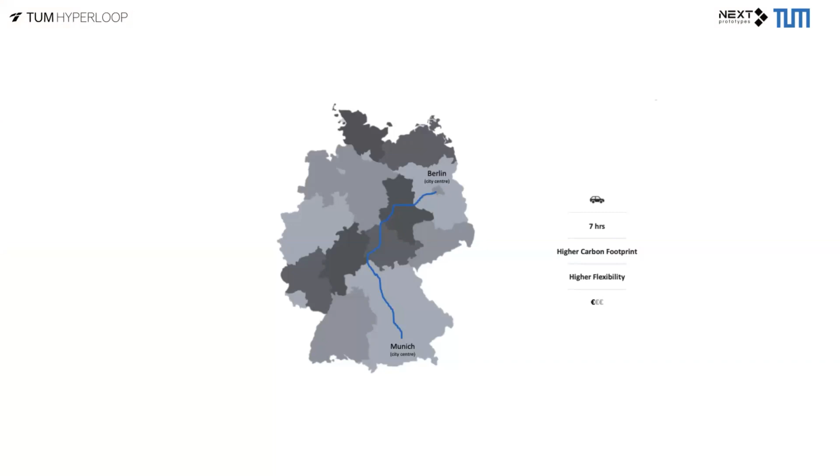For example, when analyzing one route, Munich to Berlin, we tried to understand how it is connected right now. We can see it can be connected by car, which takes around 7 hours. It has a carbon footprint that is high compared to, for example, the train, as we'll see soon, but it has higher flexibility, meaning you can stop anytime you want, leave and arrive on your expected schedule, and it's not as expensive as other modes of transport.

Continuing with this route by train, it takes around 4 hours. The carbon footprint is a bit lower than by car, and it has less flexibility, but it's also a bit more expensive than the car. Let's talk about the airplane, which is around 3.5 hours, but we can see that it has a greater carbon footprint.

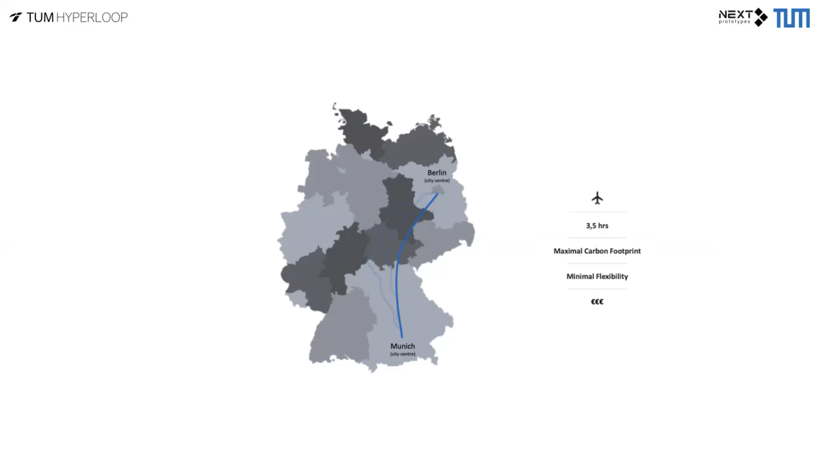There's also way less flexibility because you have to consider the strict schedules and the time to get to the airport and go through security checks. So finally, it also ends up being more expensive.

What would happen if we had this Hyperloop concept that we are here talking about and developing? It would be less than an hour trip with minimal carbon footprint, moderate flexibility, and a moderate price as well. But this all sounds great.

This all sounds like the dream, right? But what does this mean in terms of the impact it can have? What are the different steps that need to be taken to make this dream a reality? We know this isn't something that happens from one day to the other. We know this is a complete process, and it's all about progress and collaboration.

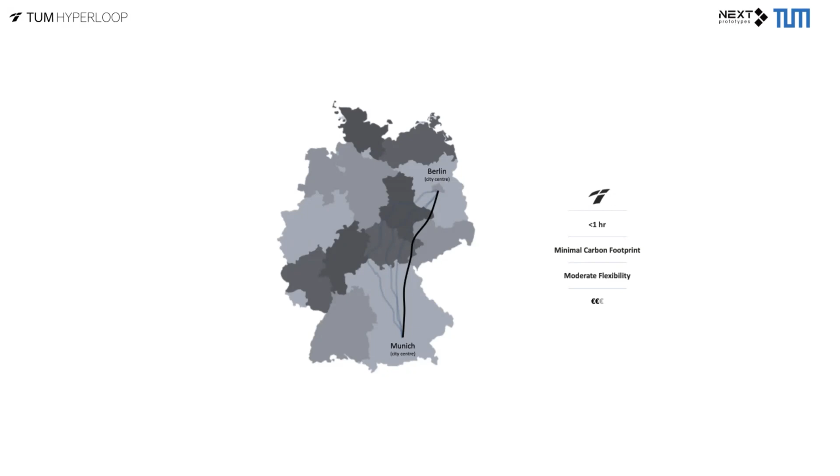And this is what I tried to discover in this research. I will talk a little bit more about it. To understand what steps are needed to introduce a new mode of transport, specifically a Hyperloop, into Europe, I tried to answer 4 main questions that would take me through the process of strategy drafting.

The first question was to understand what's the state of the art of the Hyperloop in Europe. What is the research? What are the companies? What are the research organizations? And how is that translated into technological developments and advances?

The second question we proposed was, what are the transportation trends? The idea was to see how the transportation industry is going towards the future, and then, understanding this, how can the Hyperloop tailor their own service or value proposition to fit into these future transportation trends.

The third one was to understand exactly this: if there is a fit for this new mode of transport. And finally, we were able to draft a strategy by answering the question of what would be a successful entry strategy.

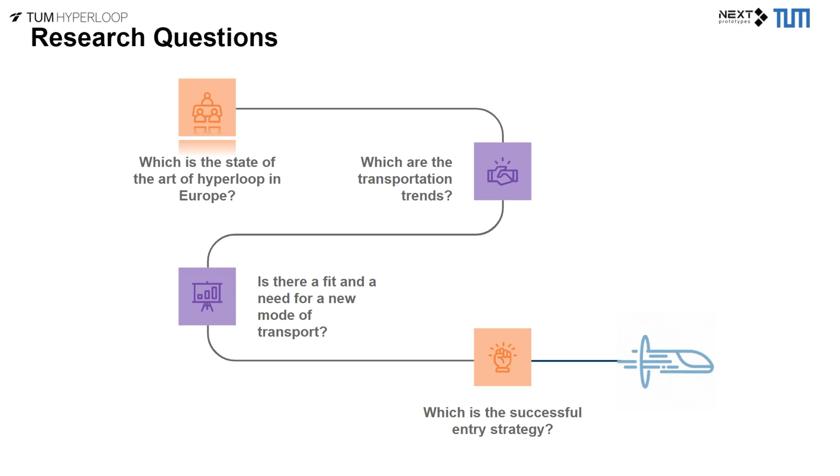These questions are targeted first of all by a literature research, which puts together all the different literature that is out there, not only scientific articles, but also different research such as feasibility studies and theses.

Then trend analysis. This was done by also different types of research on the actual status of mobility and the transportation industry, and then trying to understand the different aspects of where it's going.

Afterwards, 13 interviews were conducted with experts within the mobility innovation sector. In this aspect, we tried to target not only Hyperloop companies and research institutions, but also different companies that are dealing with mobility innovation.

And finally, there was also, as I said, the strategy drafting. So let's see how this looks like after I've explained to you a little bit of how this was all performed.

The analyzed sources that impact the European Hyperloop landscape were around 25, covering 4 main different aspects: technology, market analysis, logistics, and financials.

I am also happy to share later if someone wants to see the sources. I have a full list with the downloaded sources, because what helped us here was to come up with a homologous definition in these 4 different aspects.

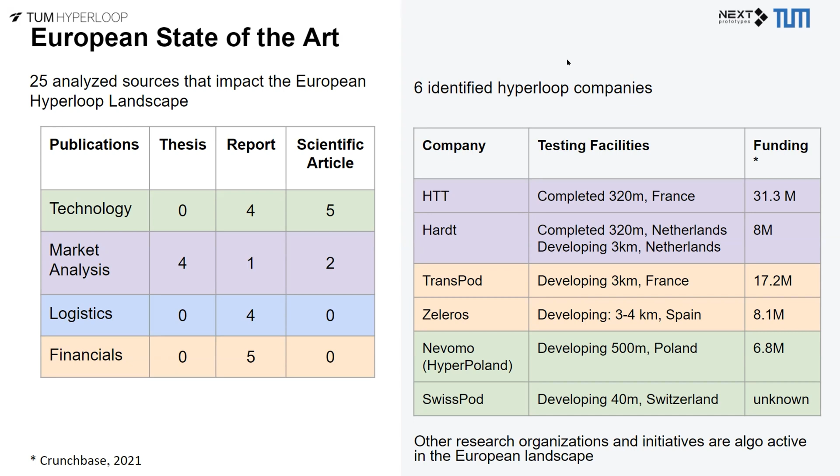We also wanted to see which were the main companies taking action in Europe regarding the Hyperloop. Sorry, I just saw something in the chat, all good. These are the main ones, and we can see that they are already developing testing facilities, as well as the funding that they have.

This funding is extracted from Crunchbase, which is a platform that gives us information on different companies. And of course, also the other research organizations and initiatives such as TUM Hyperloop. With this understanding, it was possible to see that the European landscape regarding the Hyperloop is very developed, and there's also a lot of willingness to bring this into our reality, shown by the different investments and research projects pushed forward by the European Union.

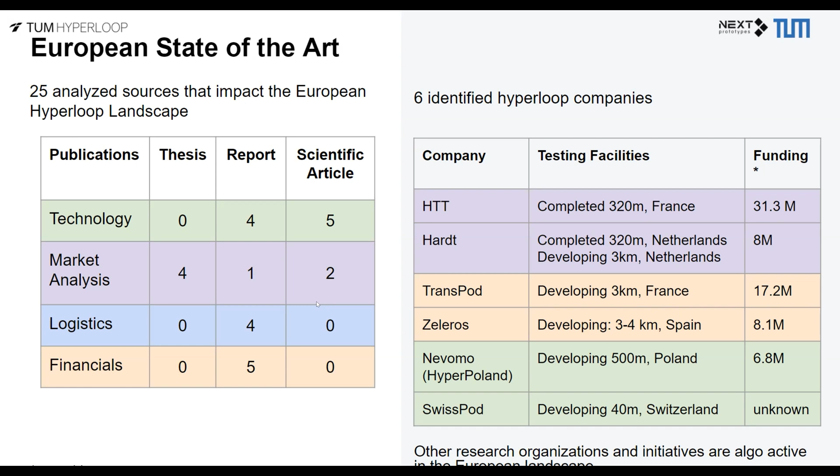But let's now look at the trends. We were able to identify trends in 3 different aspects: the economic, the social, and also the technological. This, as I said, would help us understand how to create a strategy that suits the path and future of the transportation industry.

So let's talk about the economic trends. One of them is the share economy, which is giving rise to shared mobility. We can see this taking shape in a lot of car sharing services, and more and more people are not so much willing to own a car, but rather to share it.

Also on the economic side, we see intermodality through mobility as a service. This is something already being developed, trying to integrate different modes of transport into one same platform, where you can have the flexibility to decide where and how you want to travel, combining two different modes. So in just one app, if I want to get from point A to point B, maybe I'll use a bicycle and then a train, but everything is already integrated into one same service.

Then it was also found that there has not been enough transportation funding in past years, because there are a lot of lacking projects that have been tried to be solved with European funding and also with existing state or country government, but somehow it ends up not being enough to sustain all the projects at the speed that would be wished for.

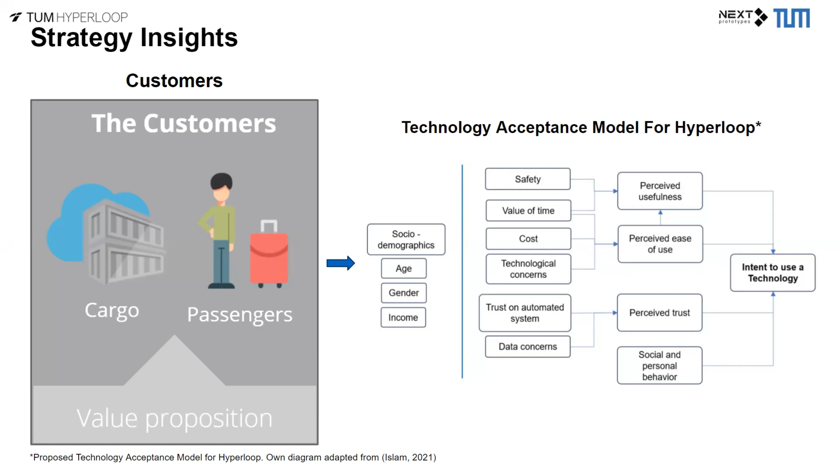But this is also very interesting research, I recommend it: the Technology Acceptance Model for Hyperloop by Islam. It really brings us more understanding of the things we have to focus on while developing the technology, but also while developing the value proposition to address customers.

Now let's go towards the other two aspects that were the main takeaways from the interviews and from the research. When we talk about the main challenges, we know acceptance is something big. We have to understand that the passengers and the public will maybe at first have a lot of skepticism towards a new technology that is also foreign to them.

So this is something that has to be closely targeted in the value proposition and also in the whole timeline of the project. Regulations are also a big issue, as we all know, and every Hyperloop developer is already working towards this, but it's something that most of the interviewees were most concerned about, because it could be a main barrier if the regulations are not done with enough understanding of the technology, but also of what the public and the whole ecosystem around the technology needs.

Then we have the aspect of sustainability and technology development. We know that developing technology can sometimes not be as green as we would wish, but this is something that also has to be communicated. I'll talk about it in the next step, but of course we also need to know how to communicate the sustainability of the Hyperloop, because we say it has lower emissions, but we also have to consider the complete life cycle of the construction of the infrastructure and so on.

As I said, I'm really happy to elaborate if there are questions, and also to send out the research. But for now, this is it, and I'm happy to hear the questions. And again, thank you for the invitation.

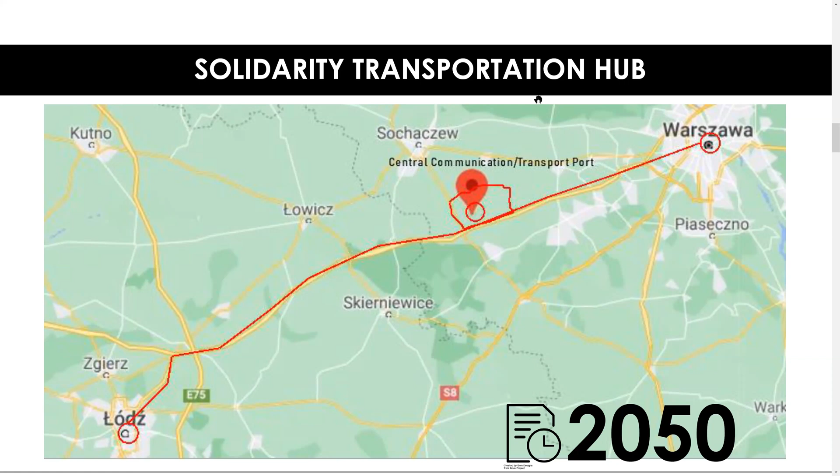What is the Solidarity Transportation Hub? It's a project of a new, modern, and huge transportation hub in Poland, supposed to be located, as you can see in the slide, somewhere in the middle of nowhere, actually, but mostly in the middle between Warsaw and Łódź. Why? Because research found that the biggest passenger flows are between these two cities, so it was natural to place a big intermodal, multimodal transportation hub with a huge airport there. All the research and preparation phases placed this huge airport with a big intermodal hub in so-called Gmina Baranów. The whole project is supposed to be finished by the year 2050, and it is supposed to change the landscape of transportation in Poland, and also in Europe.

As it is still in a conceptual phase, it is natural to place there other ideas, which are also in a conceptual phase, such as Hyperloop in Poland, part of the Euroloop network. Nowadays, we have only visualizations of several projects done by architects for the Solidarity Transportation Hub. One of them is a concept prepared by Chapman Taylor, and what is important about it is that it is explicitly said to be Hyperloop friendly.

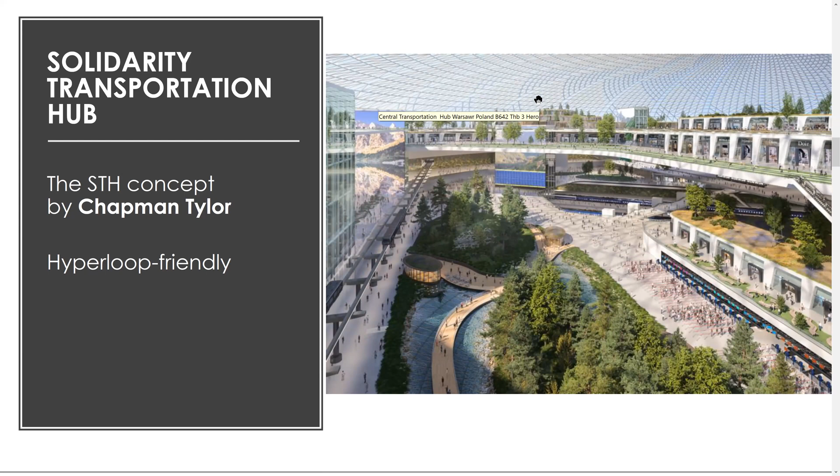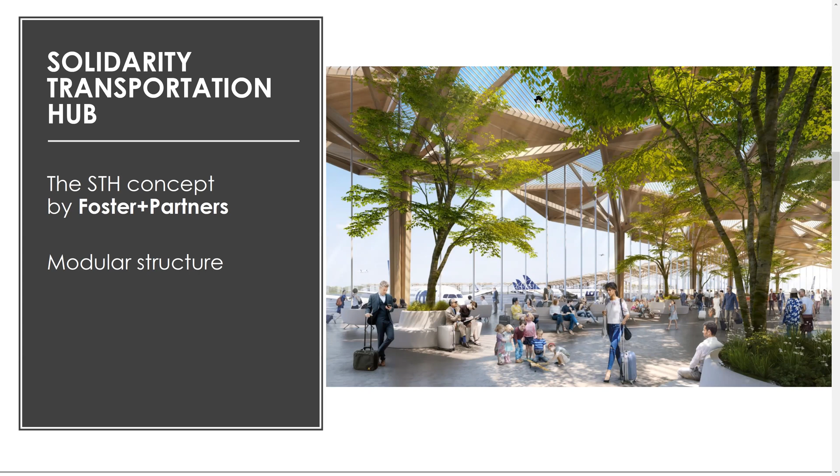So they foresee placing there, combining Hyperloop technology with this huge transportation hub. Another project, done by Foster and Partners, is the concept of a modular structure for this huge transportation hub, so there is also the possibility to place Hyperloop technology in some modules. So there is potential for combining Hyperloop technology with this huge investment. The modular structure gives us the possibility to place our station underground, overground, or on the ground, and conduct experiments with different possibilities without special costs, because it is all done via computer simulations.

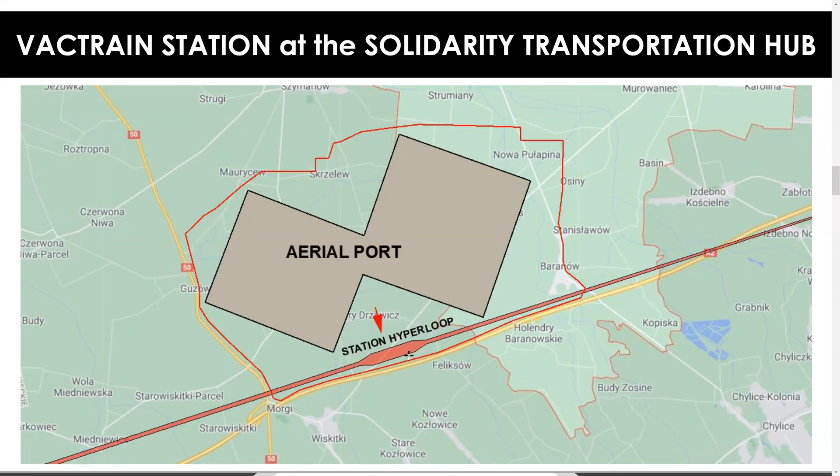So far, there is no master plan for this Solidarity Transportation Hub, so we don't know how it will be placed in that Gmina Baranów. It is our forecast here that in this Hyperloop line, we can put a station here, close enough to this big airport, so it can be a real part of it.

Vacuum technology in Poland was also a huge project financed by European funds, titled 'Potential for the Development and Implementation of Vacuum Railway Technology in Poland in the social, technical, economic and legal context.' We are part of this research, which was conducted for 17 months, and in these days was finally accepted - the results were accepted, so the project is closed.

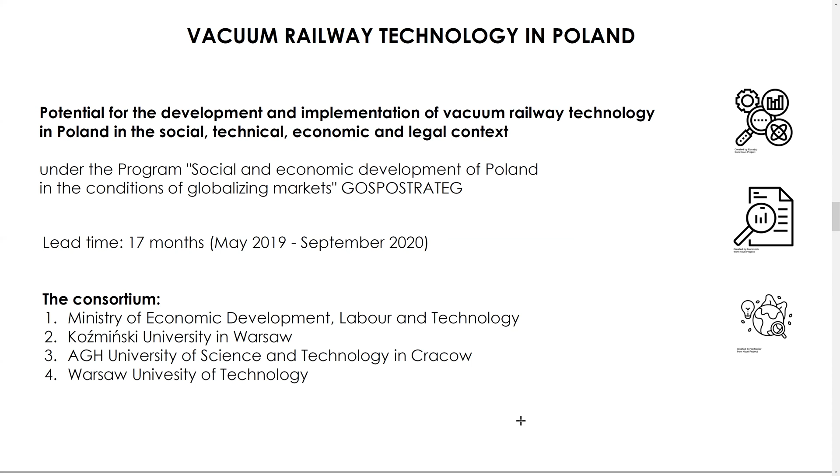The consortium was comprised of four big partners: a ministry, one private university, and two of the biggest technical universities in Poland - and here we are, the AGH University of Science and Technology. As part of our research, we designed a Vactrain underground station, supposed to be placed in the Solidarity Transportation Hub. We considered the underground route, so our station is also placed underground, because there we have much more flexibility in designing.

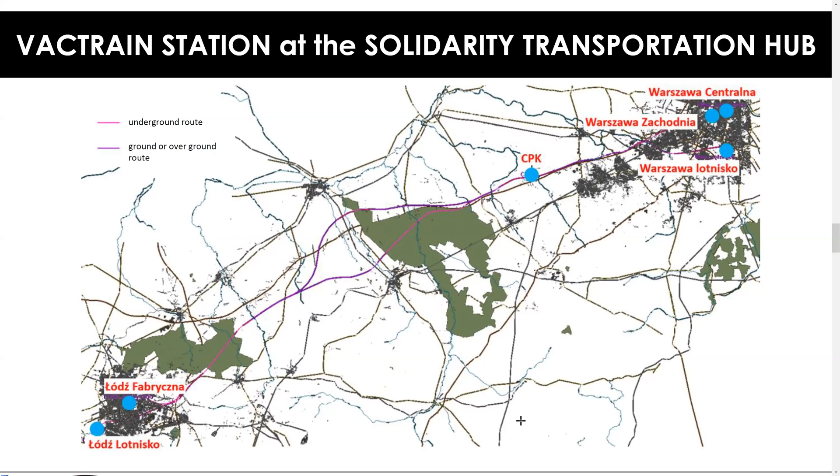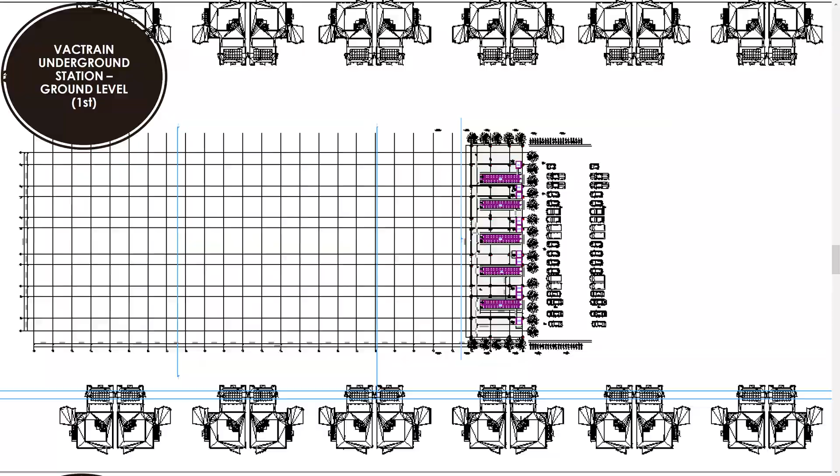The project was done in the ArchiCAD program, where we can observe 2-dimensional and 3-dimensional models. The station is a 4-layer object. The first level is on the ground and places the entrance and parking lines. The second level is at -5 meters and places some infrastructure.

Then we go deeper. Here we are still on the second level, 5 meters below the surface, and here we have check-ins, security check, and so on.

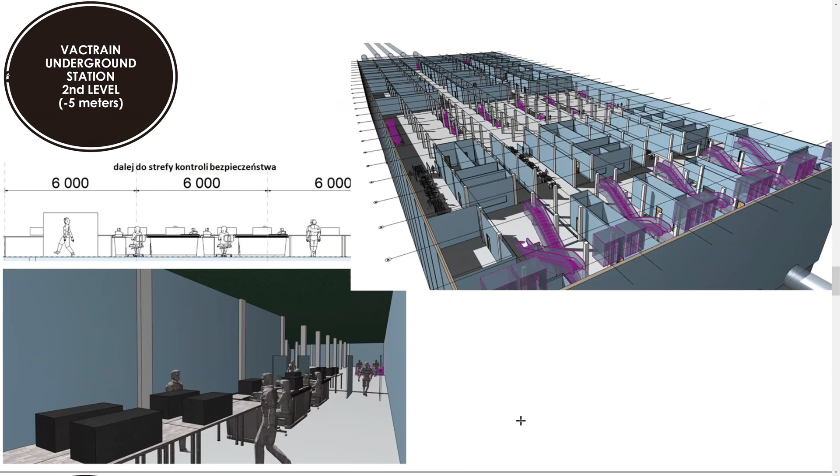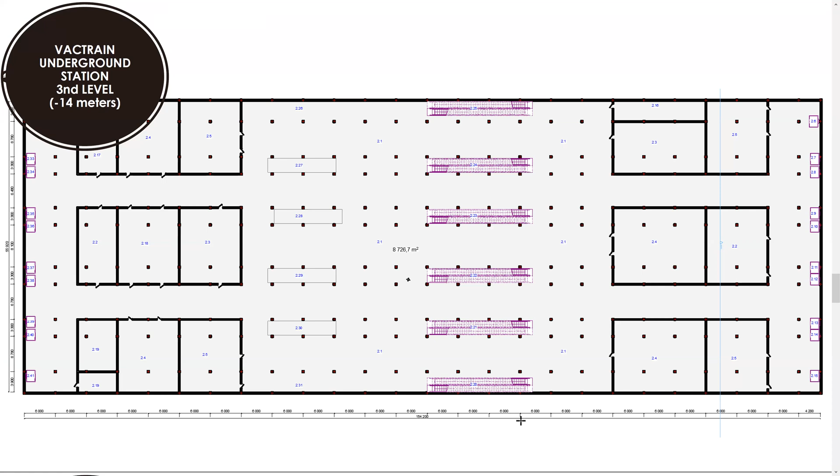Then deeper, we can go to the third level, where we have typical aerial infrastructure, on the level of -14 meters below the surface. Here is the visualization of this level.

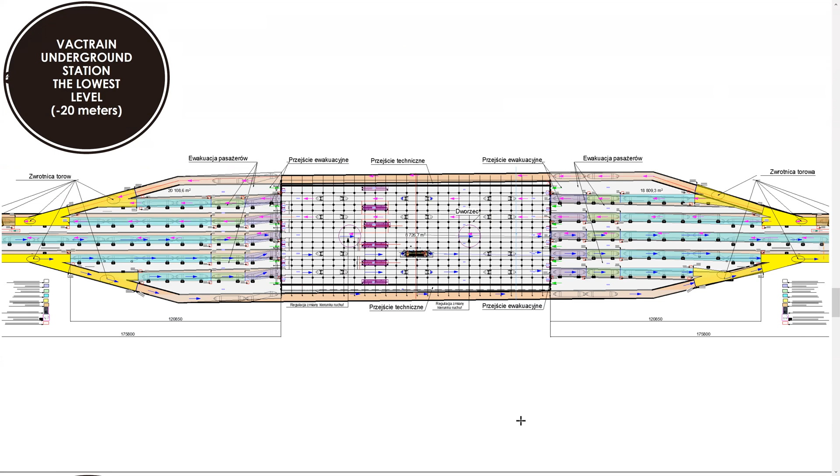And finally we reach the 4th level, and we are finally at the platforms, where we can get into capsules of low pressure trains.

Here you can see slides of this station, and finally we can show you how it could look like from the outside. As you can see, the tube here goes underground.

More details here about this design will be presented now by Dr. Strychniowska. So Olena, the floor is yours.

I'll share my screen, one moment. Can you see my screen? Not yet, okay, one moment. Is it visible now? Yes, we can see your screen. Yes. Okay.

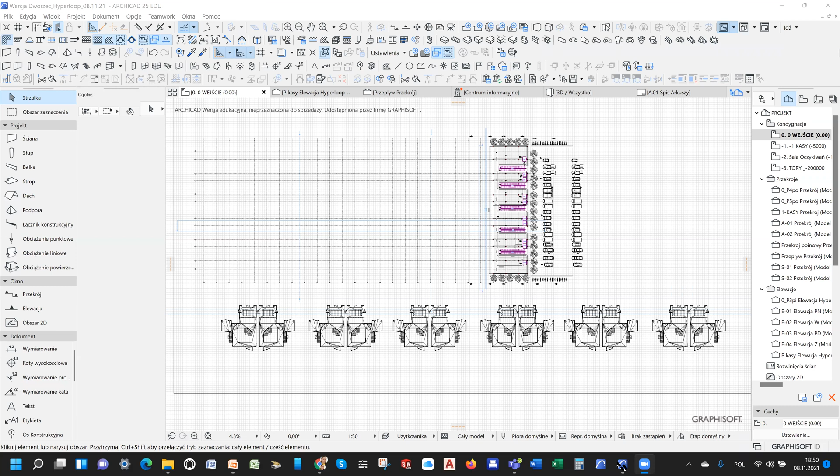I want to introduce the Hyperloop model, which is a representation of an underground hub. I used the Archicad program, and the model consists of 2D plans with the possibility of transitioning from the sections of facades to 3D.

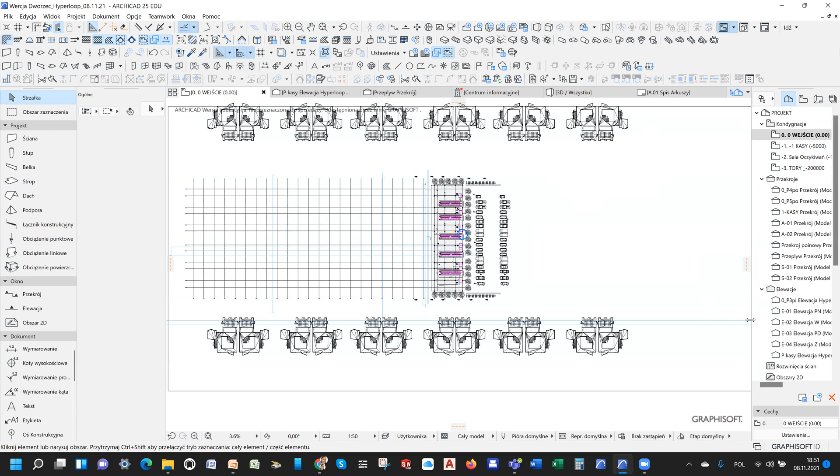I see these options. For example, I see the horizontal section, and you can see all the information of the Hyperloop.

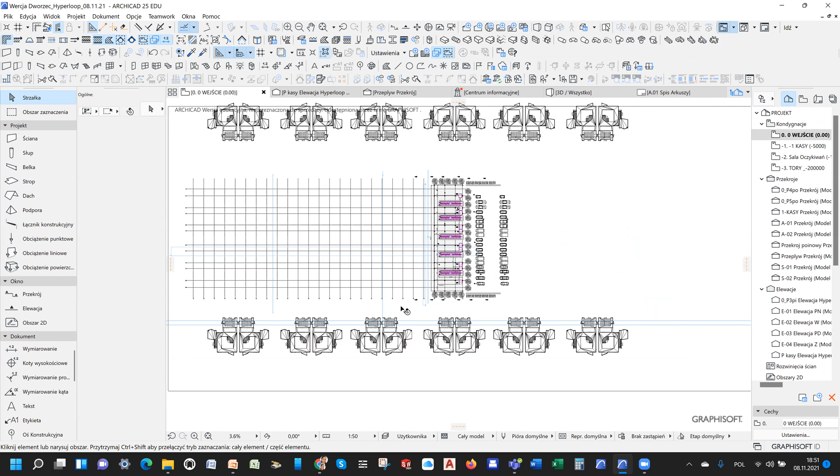The 2D plan has 4 different levels. The first level here is on the ground level. The second one is 5 meters below ground level. The third one is 14 meters below ground level. And the last one is 20 meters below ground level.

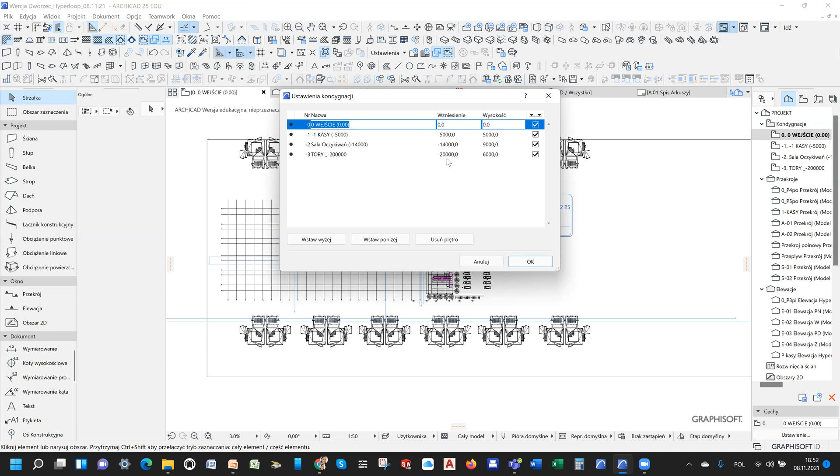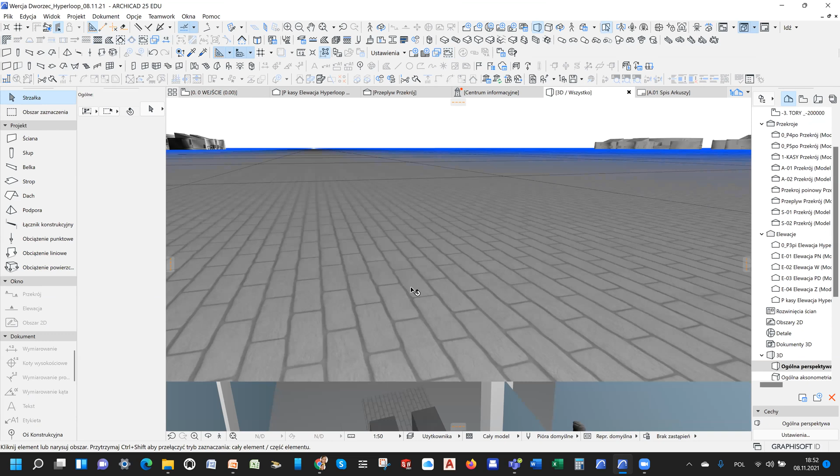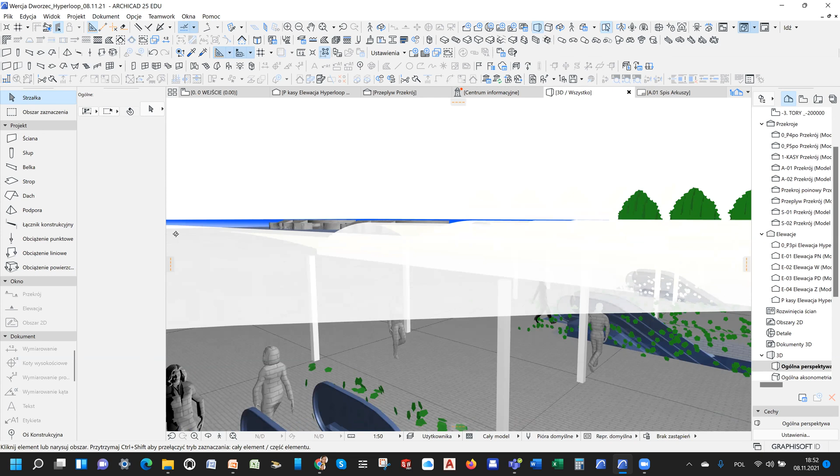On the first level, there is the entrance to the Hyperloop, which consists of escalators and elevators, so that you can go to the lower floor.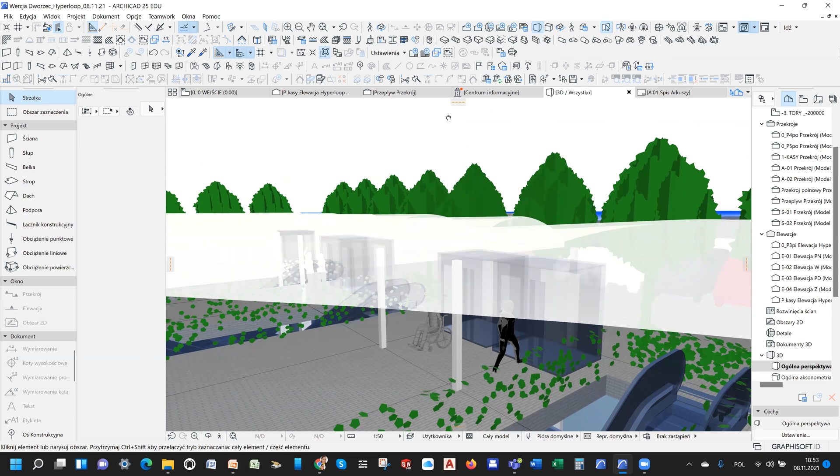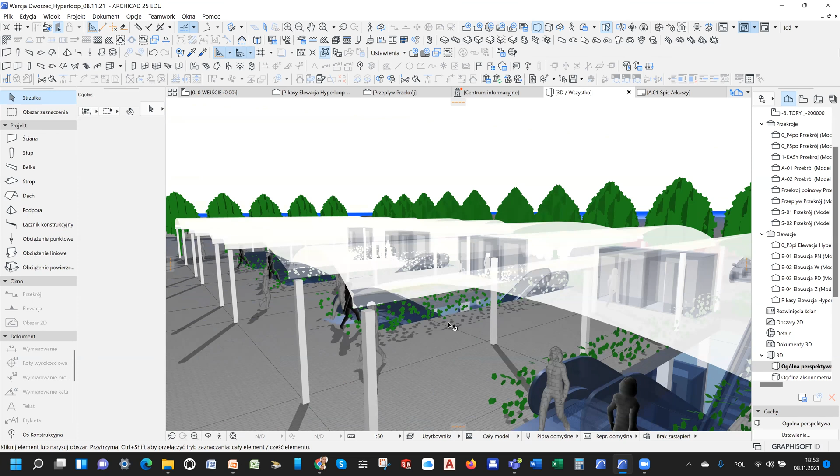A parking lot for cars and bicycles has been designed near the entrance to the Hyperloop also, for parking and bicycles.

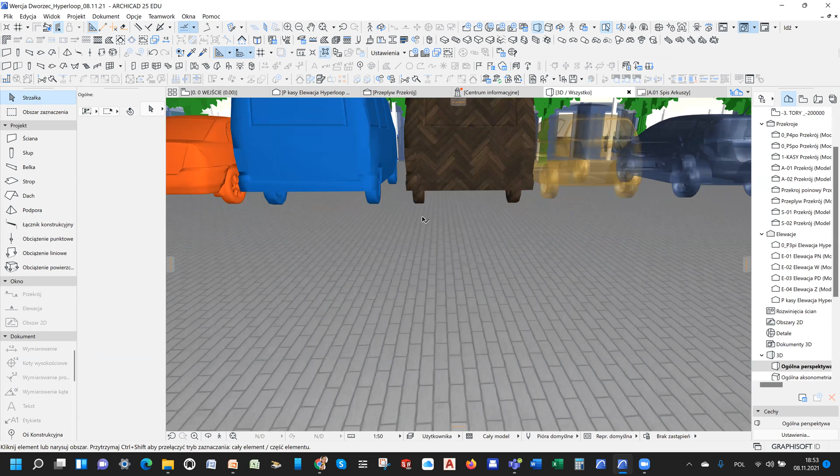Also, on both sides of the entrance, lifts for disabled people have been designed.

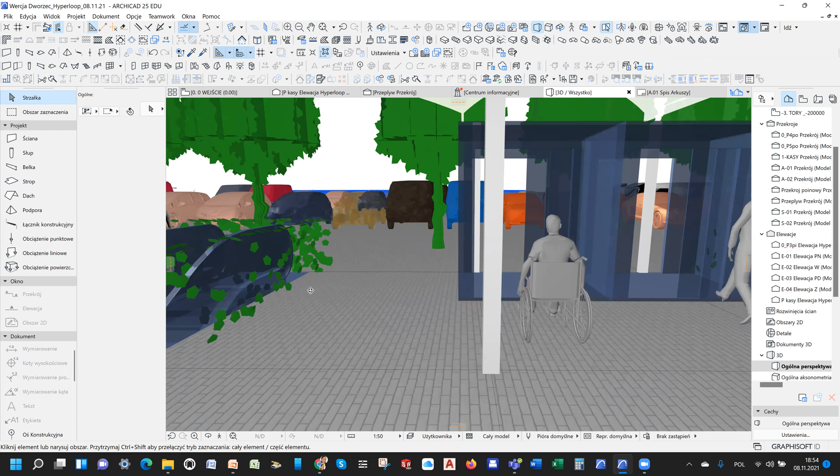On the second floor, there are cash desks, gates, toilets, administrative and service rooms, and a medical center, a lost property office, luggage office, and boutiques.

And we can go down to the lower floor.

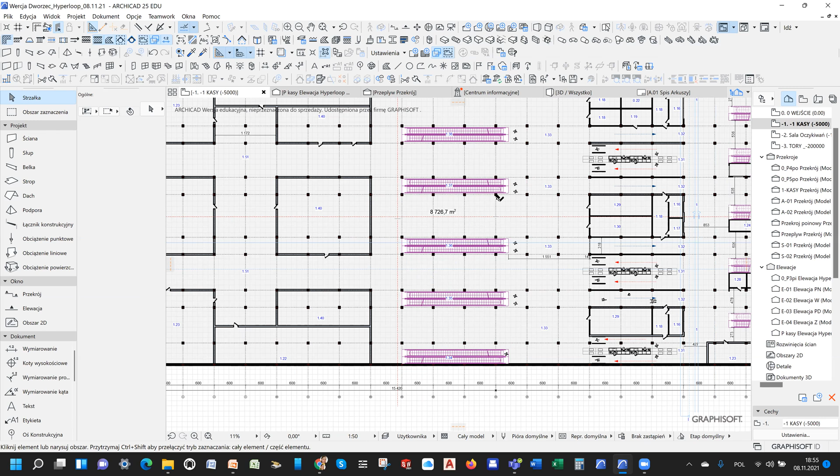On the next level you can also see boutiques, a city cars room, utility room, disposal room, office, break rooms, VIP rooms, and a room for disabled people.

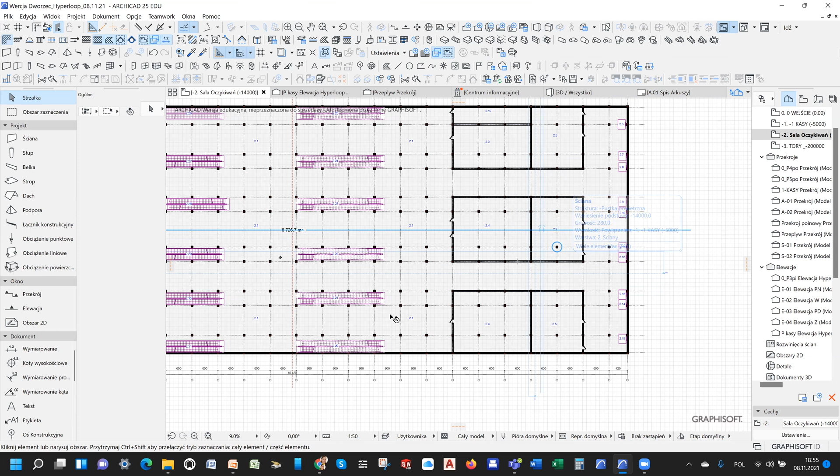Safety gates also, and an exit zone, a zone for entering escalators, reaching the lower level and last level.

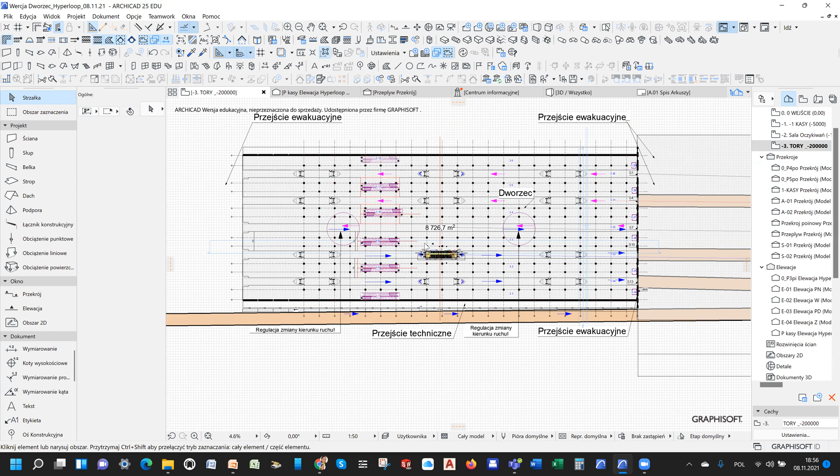On this last level of the model, there are platforms to enter or leave the Hyperloop capsule.

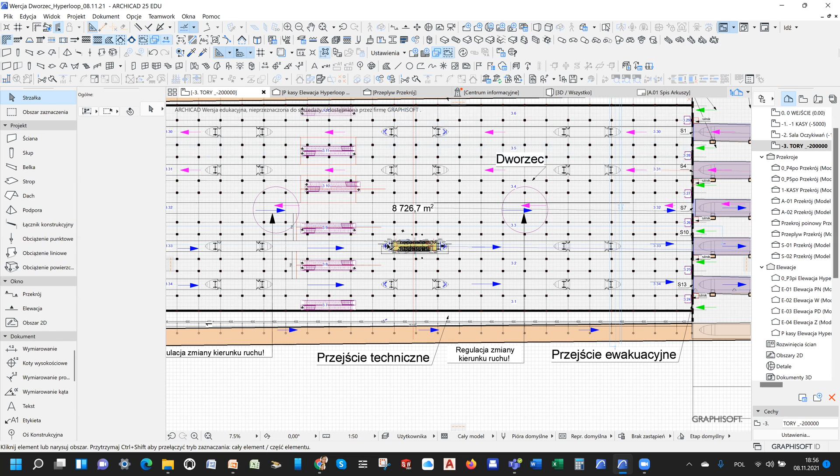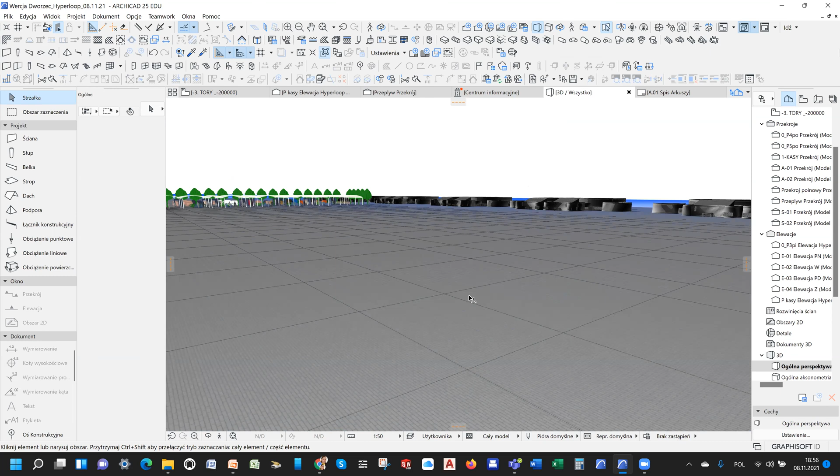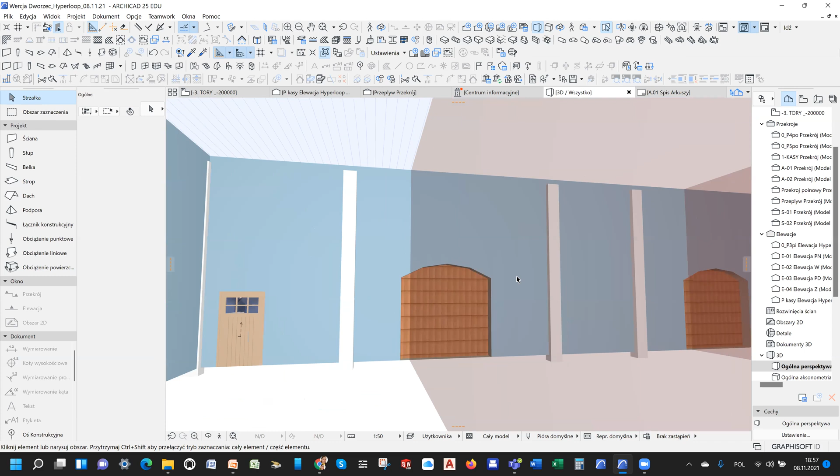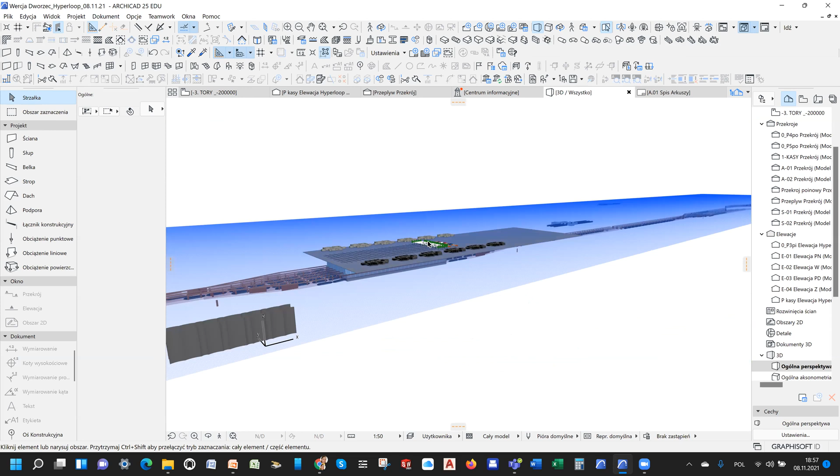And we can see the 3D model, the capsules, and we can go through the rooms. We can see all of the model of Hyperloop.

This model has so many objects in ArchiCAD, and individual objects as well.

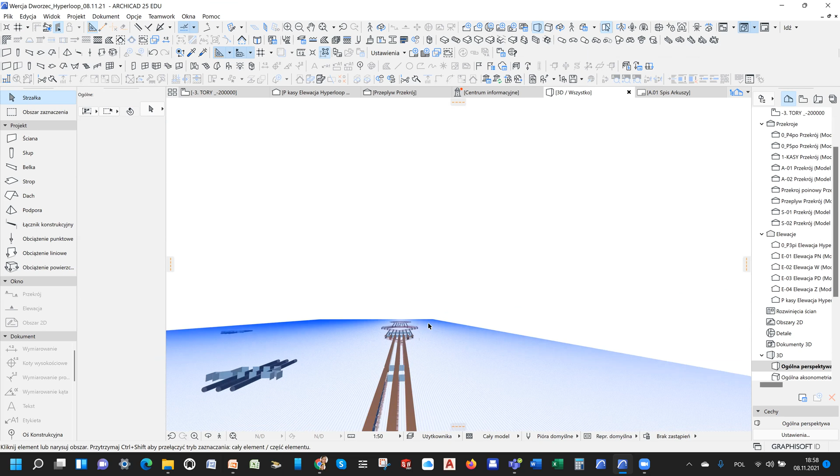This is the entire transport system for the Hyperloop, and this system I see now.

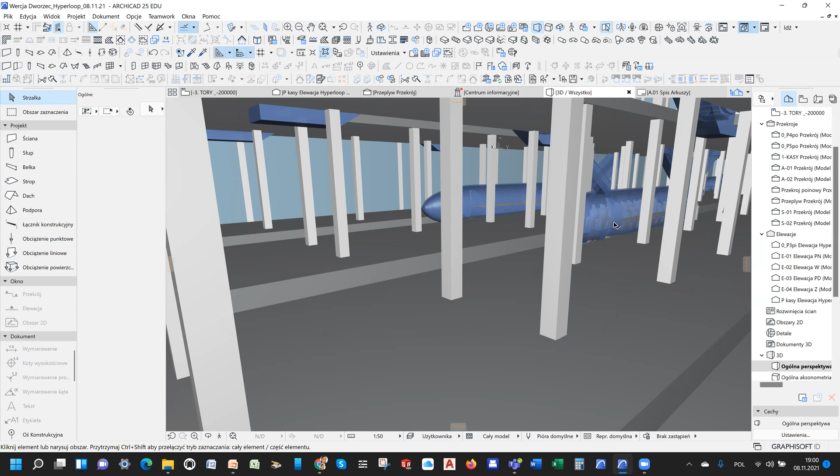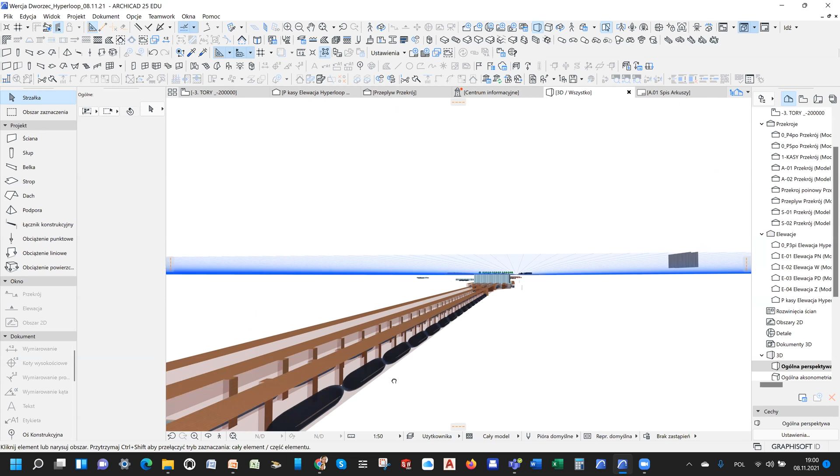Can you see capsules and people in the capsule? And all of the transport system. Okay, thank you for your attention, and I give the floor to Dr. Rafał Rumin.

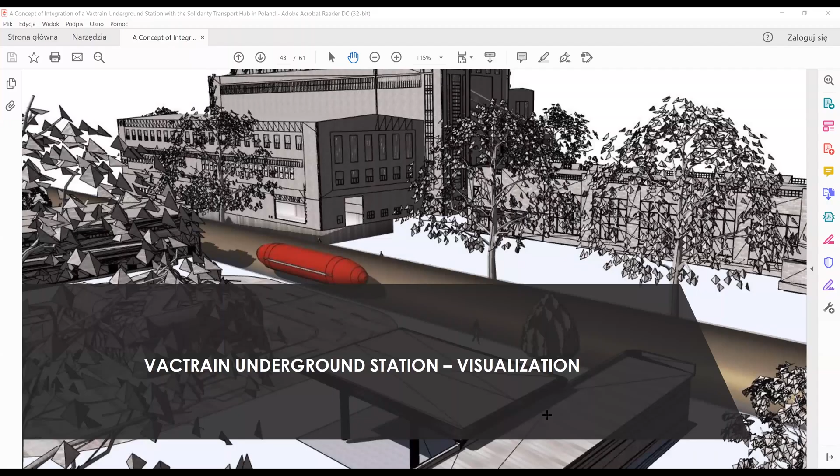Okay, Dr. Gdowska, please share the screen with the presentation, and I will start to talk about why we are showing you the ArchiCAD design and all these details.

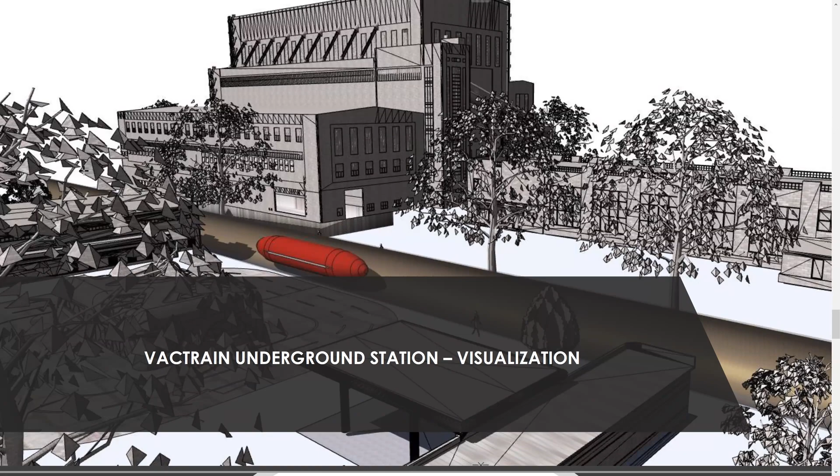Mainly because the work we've done here has not only the aim to show a visualization of how it could look like. We wanted to do something more, and we did something more, because we prepared simulations based on this conceptual model. Next slide, please.

Based on this conceptual model, which was done by Dr. Stawnicka, we created a simulator using software like FlexSim. We created a dedicated station system which can be supported by passenger flows and capsule flows.

The whole system can be included in those simulations, and we will share some basic data about our model to give you information about what we can provide as a team, for example to your models in the future, if you would like to join or invite us to operations.

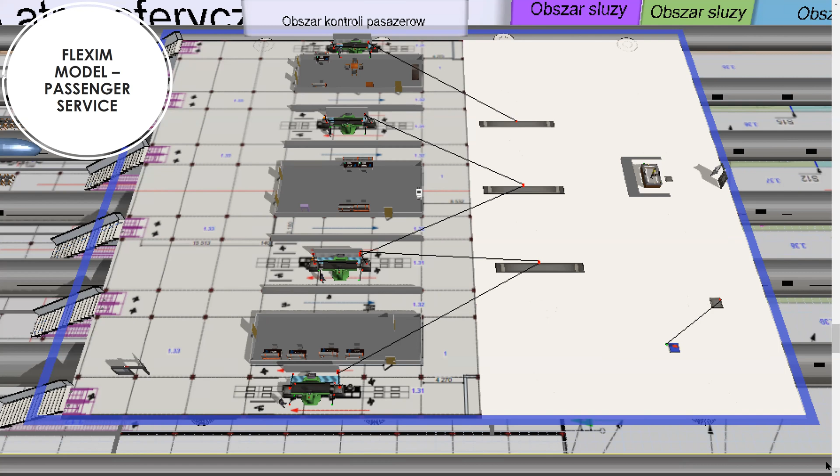Here you can see something like a simplification of our passenger flow. On the right side, there is a gate where passengers come into the middle level of the station, and those passengers go through passenger control, luggage control, COVID control, and all those things that have to be done before they go to the platforms.

This model is a station which allows our capsules to go through. It's not the last station or the first, it's the station which allows going through, and that's why from the left side it's possible to drive by capsule to the right side, and also from the right side it's possible to drive to the left side. Of course, the simplifications you see here are graphic, but our model has a lot of details.

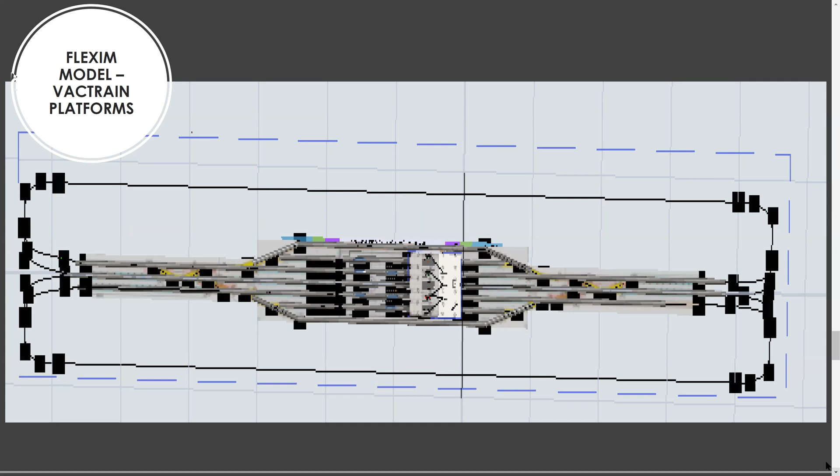Please, next slide. Here you can see a little zoom of this. The middle floor, the middle level, is the white one in the middle, and below is visible the area where the station is, where the platforms are visible.

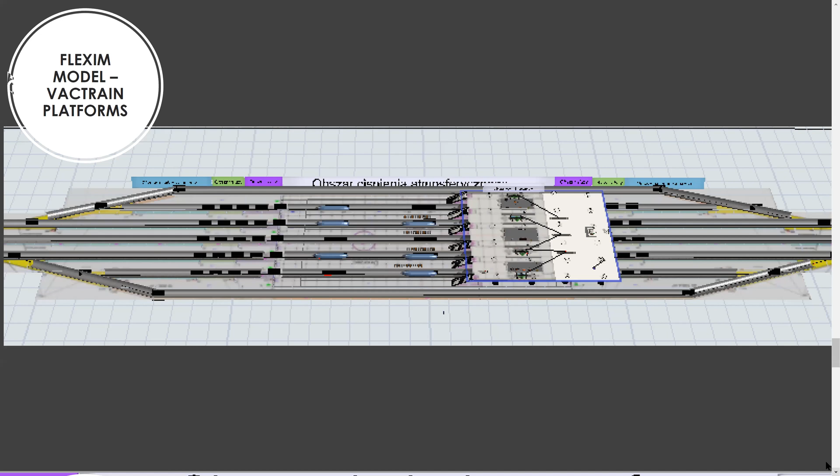Next slide, please. Oh, that's right. Here you can see the visualization, but also the simulation points where our capsule can stop to get the passengers. Of course, in our simulation we can change the number of capsules, number of levels, number of platforms, number of passengers, a schedule table, etc. That means it's a fully scalable model, which allows us to change any kind of factors we want to put into our model.

Here there is an atmospheric pressure area. That means here the passenger comes directly from the ticket office, for example, and they can go directly to their own capsule. Next slide, please.

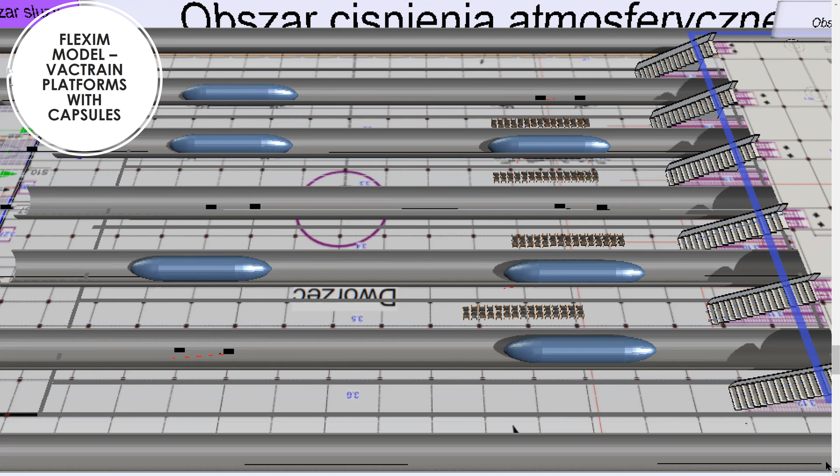Here is another view from the passenger point of view, from the middle level, where you are right now in the gate that allows you to enter this level. And after that, you can go down the stairs to our platforms.

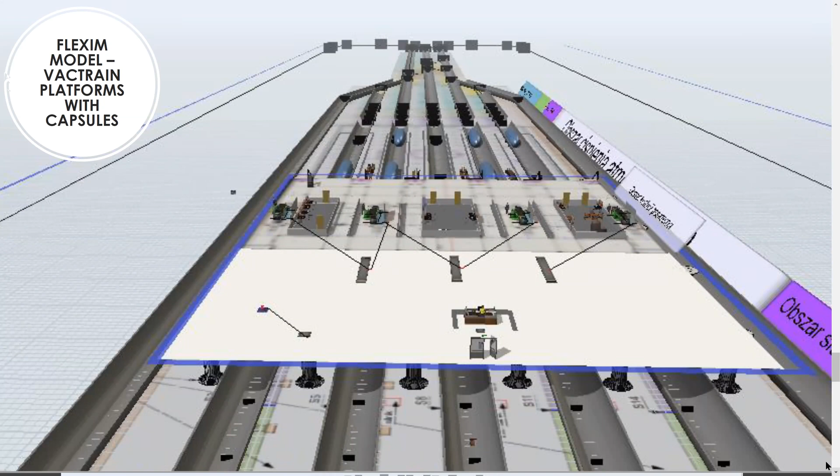Please, next slide. Here's a slide which shows you the visualization. As you see, the passengers are on their way. Some of them are in the queue. Some of them are just entering the main gate.

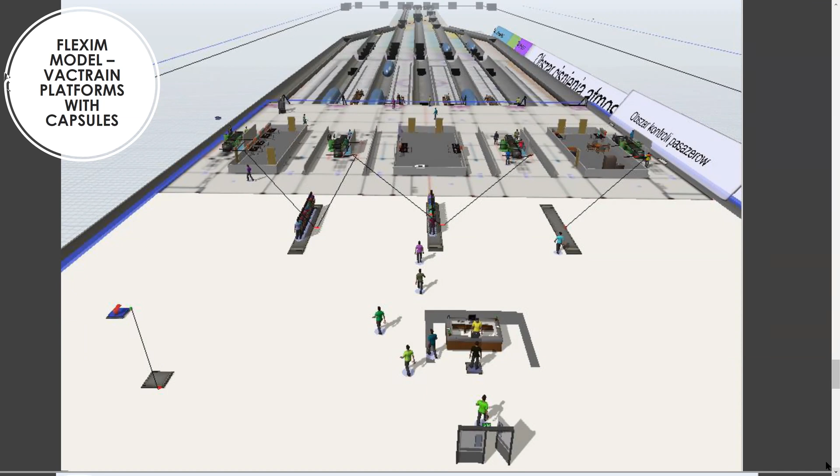Of course, we can make a simulation to select how many security gates should be open, dedicated to the timetable of the capsules or the time during the day, because the peak of passenger flow can be at different times, morning or evening, but during the night the passenger flow is minimal, it's lowest. Next slide, please.

Here you can see our passengers go through those stairs and go to the selected chairs. You can see there are a lot of simplifications, as I mentioned, but the key is that we can redesign this model to achieve dedicated results of simulation.

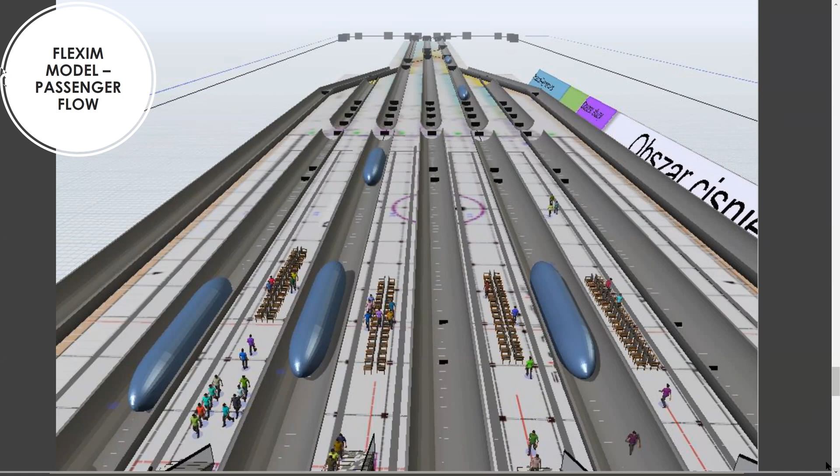Please, next slide. Another zoom, as you see the simplification—for example, the shape of the capsule is really simplified, because this model is huge. We want in the future to keep at least 5 stations like that.

Each of those stations will be connected together. A lot of passengers will go through those stations. That's why if we import dedicated graphics for our capsule design here, the model will be really hard to run on a normal computer.

Of course, we will take part in scalable computers, which will allow us to do it, but we will do that after we build the full scalable model, for example, for 5 cities. Next slide, please.

Here, as I mentioned, there is something about the pressure and about the air. I will talk about that. Here, the whole of this area is normal air pressure. That means the passenger can go here and just enter or exit from the capsule. Next slide.

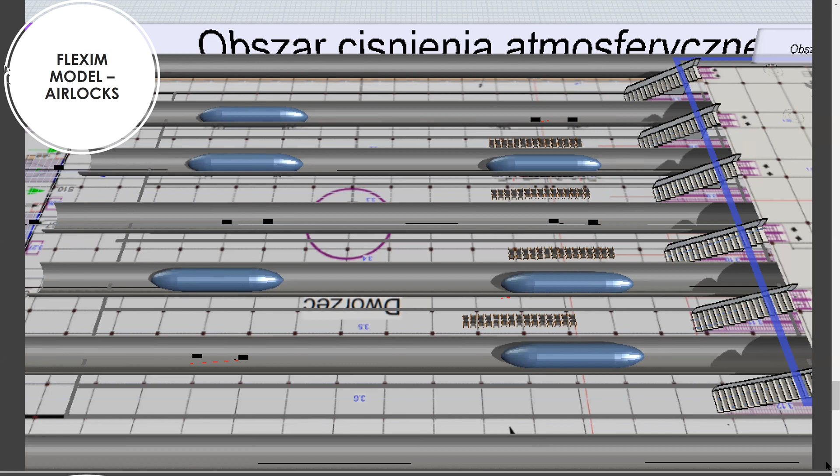And here you can see the vision of where the areas for the passenger are. You can see on the left side, the white area is the dedicated passenger area. On the middle side, there are some areas where our trains or capsules can change their platform and change their tube.

But these intersections are right now still in the air area. And on the right side, you can see the double colors. There is a place where our pressure chambers are, using airlocks to reduce the pressure inside the tube.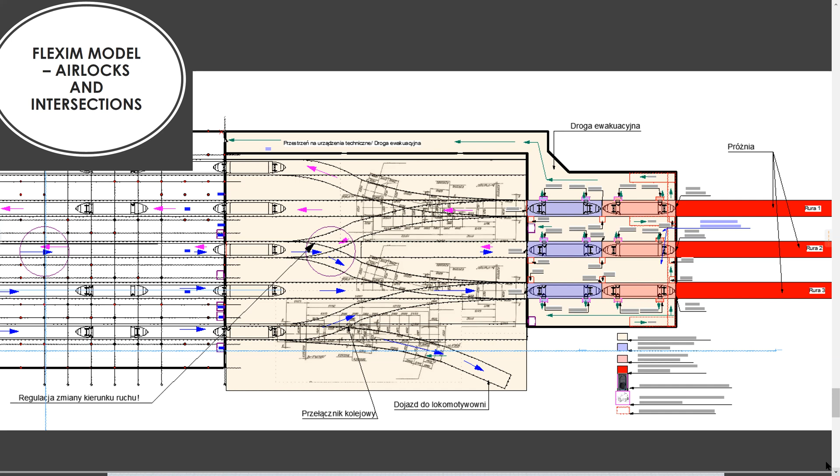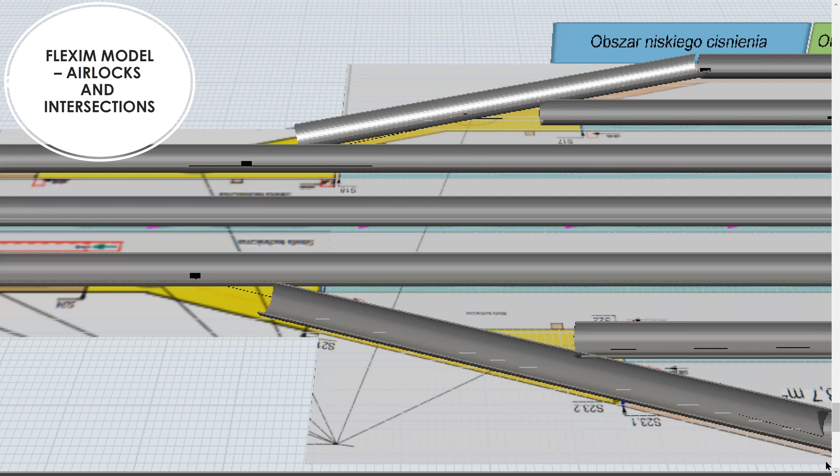Based on that, we prepare a simulation where we create a dedicated airlocks model and our intersections, which will be visible in the next slide. Here you can see, using those intersections, our idea was based on normal railway stations, because based on those simulations, we see the big scalable factor using normal intersections, similar to railway technology, for example.

You can see only a small part of our results, because right now some of the results are not available to share directly, as this is our IP. But we want to give you opportunities to collaborate with us, because we are scientists. We want to share our knowledge and take part in some projects, and perhaps if you see an opportunity to work together, we will be able to give you detailed information about our model.

But of course, we will be able to build a model for other companies or teams. It's a huge advantage when we can create a fully scalable model, and when we can receive different data from it from a statistical point of view, data from passenger flow, etc. That gives us answers about which kind of connection between two cities should be built to receive return on investment, for example. And this is a key question: to build or not to build Hyperloop in a selected direction.

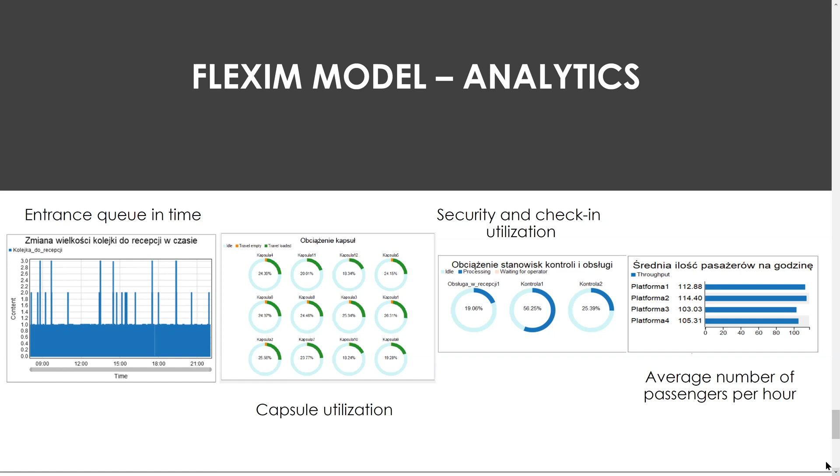Last but not least, we want to show our design also in a real view. That's why we want to make a scaled 3D printed version of our station. We started preparing tests on how to print components while keeping it scalable. That's why we began cooperating with student groups who started to work on this. This group is Transpeed AGH, and they started to work to design, build, and in the future present the full scale of this station in reality.

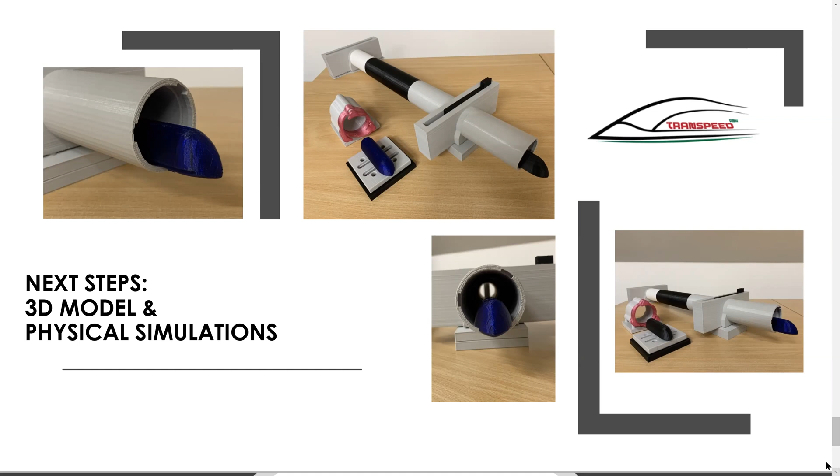Next slide, please. And now, Dr. Gdowska, please show the final remarks of our presentation. Okay, so now it is back to me.

As you can probably sense from our presentation, we were in a perfect condition to design a station for a non-existing technology and place it in a non-existing airport. So we were not limited by spatial constraints and other constraints; we were only driven by economic calculus and availability of technological solutions. This is why we worked on digital twins of our station, and we have huge experience in designing using simulations of digital twins. This is what we can share and collaborate on in this area with other Hyperloop teams, because we all create a Hyperloop ecosystem in Europe and in the world.